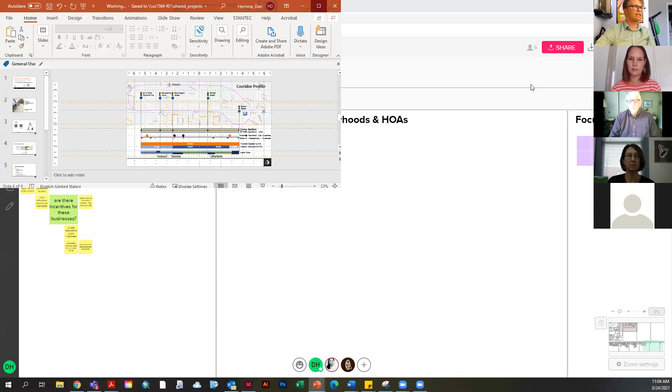Mike will be calling in momentarily here, but in the meantime, we can go ahead and get started on the meeting. First of all, thank you all for joining us. My name is Dan Hemme, I'm a transportation planner here with Stantec. We've been working with the city, as I think most, if not all of you, are now well aware of, on this complete streets study of 15th Street.

We are sort of in the process of this design charrette, this project charrette. We're in day 2 of 3, and as part of that we're conducting these focus groups to drill down a little bit more into the corridor and understand some targeted issues and get some more specific feedback on what are the challenges and what are the opportunities.

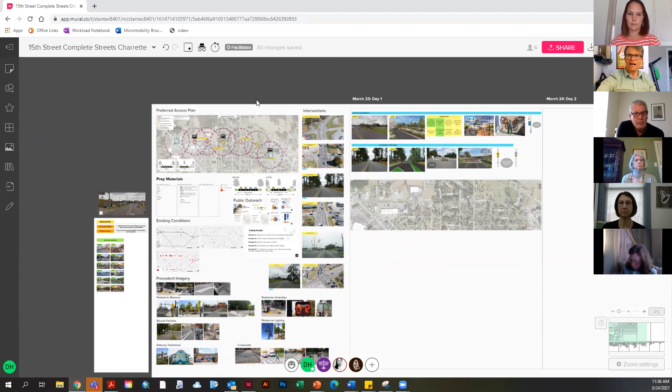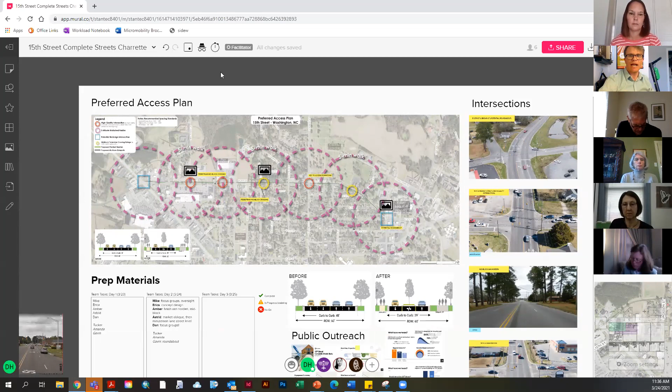So here's a look at what we've been working on. Some of this was done in preparation before the charrette, but over the last day and a half we've really been preparing this concept for the corridor. We start everything from the preferred access plan, which lays out at a conceptual level how people are going to interact with the corridor. What are the intersections that are really important? What are the areas where people need to be able to cross the corridor? What are the safest places for people to cross?

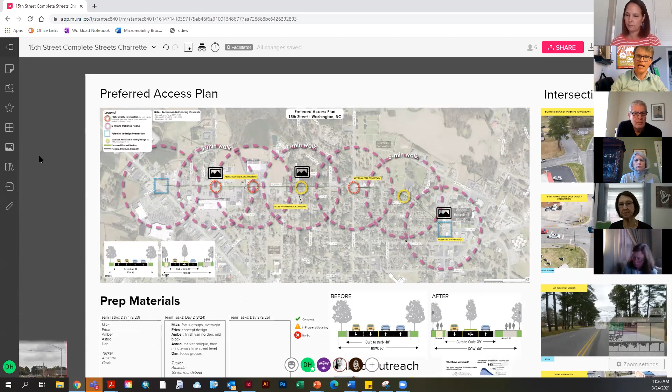And so this really encapsulates all of that. You know, the design and treatments may change, but everything will still reflect this base concept of how people are accessing and using the corridor.

We look at things like Market Street, which is highlighted as what we call a high quality intersection. That's somewhere where we'll be looking at putting in things like mast arm signals for traffic lights, pedestrian countdowns, and high visibility crosswalks at the intersection so people can cross. If there's a median coming up to the intersection, we'll look at having a pedestrian refuge island there to give people the ability to cross and have safe passage.

Other locations, like over at the cemetery, and I'm calling out Van Norden Street there, Vanessa, that's a mid-block crossing. So even though there's not a signal there, these are locations intended to give people the ability to cross the intersection. You'll see that those two are in key locations, in that purple circle labeled as a walk shed. By putting them there, we're creating these overlapping areas in these walk sheds. What those represent is that if you are within that circle, you are within a short walk to have safe passage crossing that corridor, whether it's pedestrian, bicycle, or any other means.

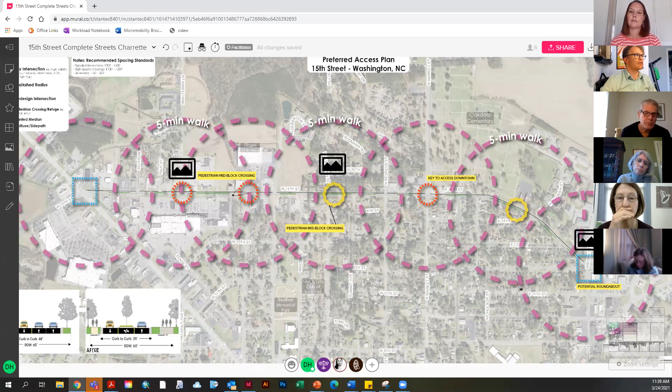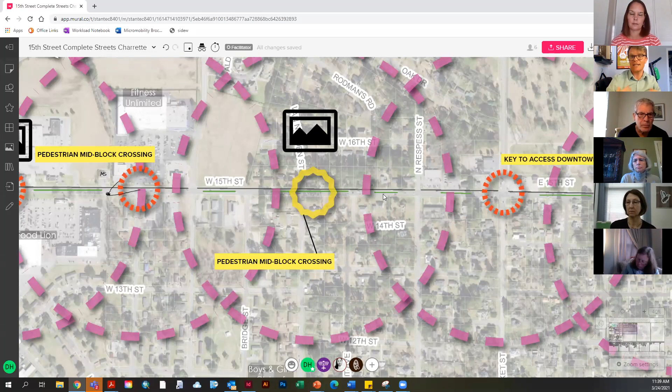So zooming in a little closer, we started laying out ideas for a shared use path along the north side of the corridor. Those faint green bars you might be seeing are areas for pocketed medians, looking for ways to improve the safety and operations of the corridor by introducing a center turn lane, providing opportunities for people to continue using the through lane to drive, because turning crashes are one of the big concerns here along the corridor from people who stop in the middle of the roadway to make a left-hand turn.

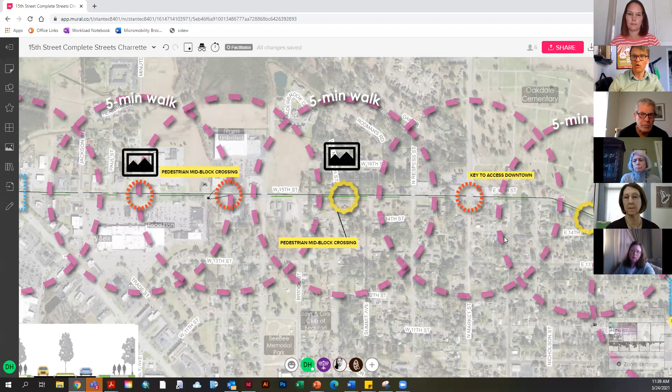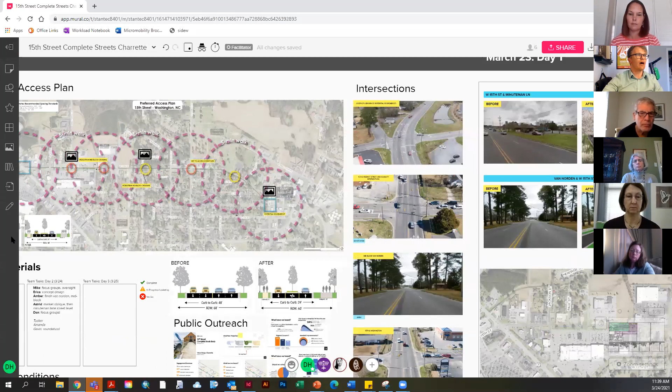It also provides the ability, if people aren't going to cross at those intersections, that they at least have that median in the middle where they can feel some degree of safety doing so. So for these high quality intersections, that's what we start to go in and produce some renderings and redesigns to help visualize what a high quality intersection or a mid-block crossing looks like in practice.

And those are the things we started working on yesterday, in various states of development. We've got Minuteman Lane here, at the right in front of the Tractor Supply. We're looking at what a center median, a planted center median, looks like. What does it look like to have a shared use path on the north side of the roadway? And what does it look like in the context of maybe inviting better private redevelopment?

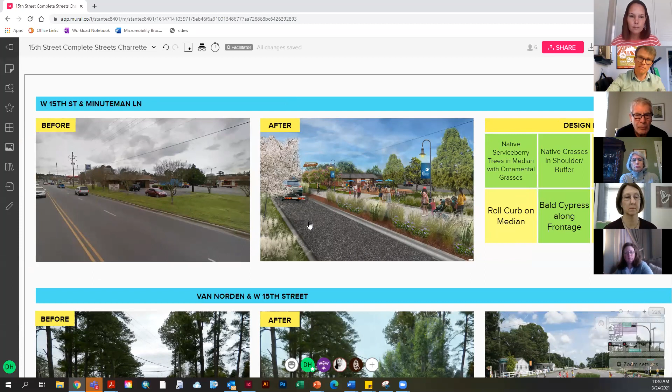You might want to zoom in a little bit, Dan. Zoom in on the before and then transition, because that's the hard thing to see. Sure, not a problem. Yeah, I don't have context on how big the shared screen is here, unfortunately.

So this is what you guys see right now with the taqueria there, and having space for bicycle, pedestrian, for sidewalks, and then this is... So just to put it in context, keep it right there for a second. Just to help you visualize, and now this is Todd.

Ned, you had mentioned some questions before about right-of-way. We're not pushing the right-of-way back. We're not taking additional right-of-way. We're actually moving the outside curb and gutter in. It's 4 lanes right now. We're getting rid of one of those lanes by pulling in the outside curb so we can put in a protected bicycle side path or multi-use path, if you will. That way we cater to ages 8 to 80.

Anybody, from an 8-year-old kid with a helmet who wants to ride their little bike, to a retiree that just wants to get out and stretch the legs and go from A to B.

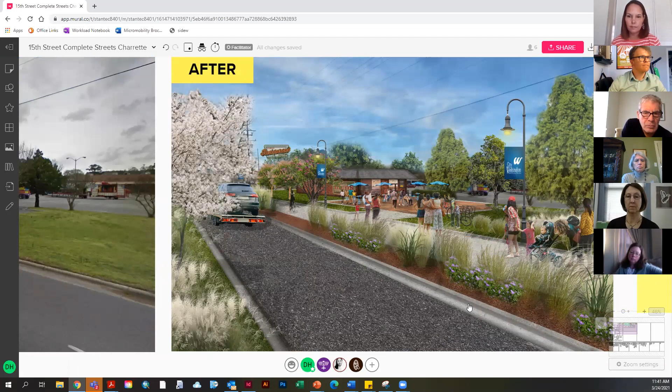When we do that, you can see, and we incorporate—let's go to the next page. This is just a segment where we're talking about putting in a protected, plantable median because there's no curb cuts there; no one needs to take a left turn or right turn in or out. You can see this is right in front of that Washington Plaza, the Mexican restaurant in the foreground. But how awesome would that be, right?

If you zoom in a little, you've got the side path that's hopefully going to be well used, plus outside seating and some low-level ambient lighting. This is repurposing a building that's there, keeping it in context with what's already there—they're still going to serve the same taco they do today. Providing outside seating was one of the things missing along this corridor that a lot of people had expressed interest in.

You have pedestrian-level lighting with a nice banner there to celebrate that. When people see this, along with the physical verticality from the street trees and the lighting, people naturally slow down, just like they're doing on 5th Street. That's what we're catering to—we're not trying to divert cars by any means, but we are trying to get them to slow down.

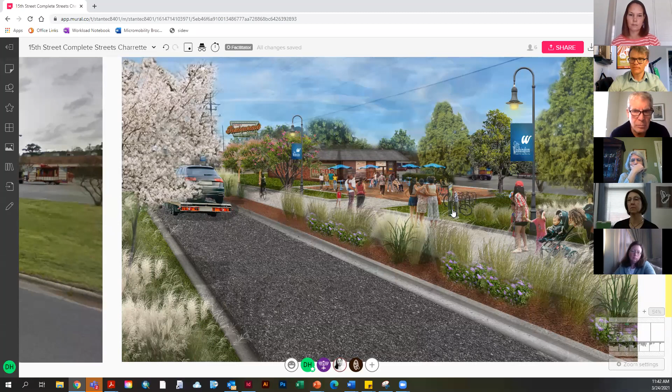Speed differential was the number one issue identified by your chief of police. Honestly, 3 people have died in the past 10 years—that's 3 people way too many who were pedestrians or bicyclists along this corridor. That's a horrific statistic to hold on to.

I've said enough about this one. Sorry about that, Dan. No, not a problem at all.

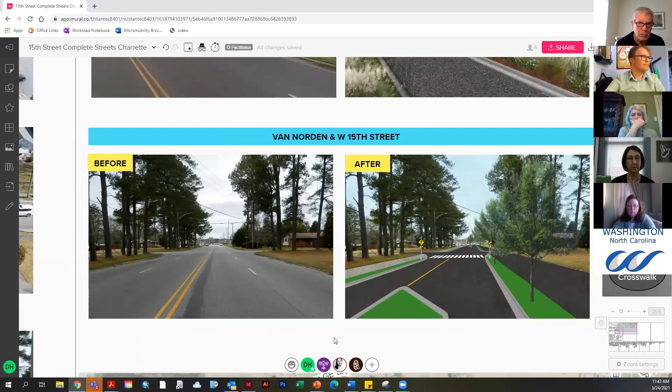You can get a sense of it. The next one is just a mid-block treatment—we don't have to go into too much, but I think Vanessa, you mentioned you live right off Van Norden?

If you think about it contextually—zoom into the before picture—look how far back the nearest intersection is in the foreground. Now, Vanessa, if you're walking down Van Norden, are you really going to walk 1,000 to 1,500 feet to the west just to cross the road? No, and no one does—they cross it anywhere they can.

Exactly, and that's the effort here—thanks for being honest, but the reality is she's right. So what we want to do, as Dan showed with those walk sheds, is make it more predictable for folks to walk across.

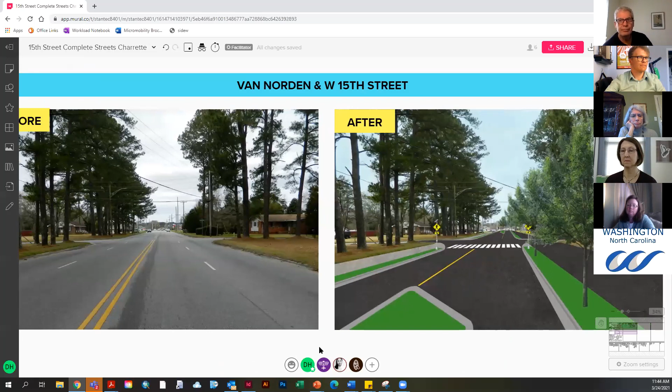So this is a simple mid-block crossing. It doesn't mean we're putting in a new signal, but it does mean some kind of actuation—either a rapid flashing beacon, which could be push-button activated by a pedestrian or a kick-button for a bicyclist—to let drivers know they need to stop and yield to the pedestrian crossing. Right now that person is running across unprotected; you can call it jaywalking if you want, I don't believe in that term, but people are crossing the road unprotected, that's for certain.

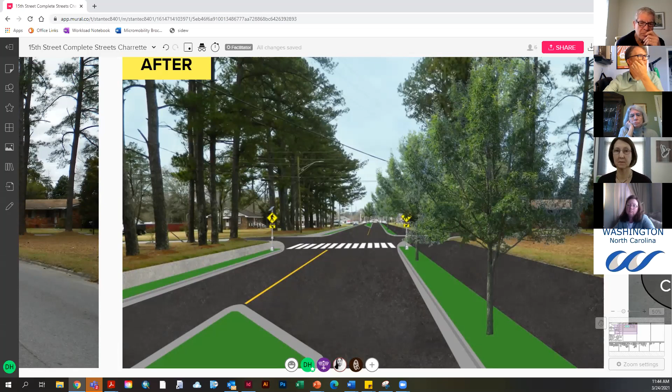This is an earlier rendering—we'll improve upon this later today. We don't have a whole lot more than that, but I'll stop there and see if there are any questions. At least you get a sense of what the community is collectively trying to achieve.

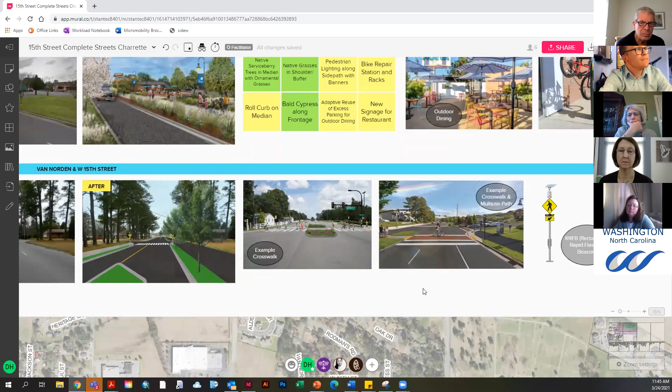At the end of the day, this is very important—the bottom aerial Dan is showing will give you the physical footprint of the improvements, a plan view along the entire corridor. You'll be able to see where the 3-lane cross section is, where the 2-lane cross section is, where street trees are located, and where the high-quality intersection treatments are—high visibility crosswalks, pedestrian countdowns, mast arm signals, as well as gateway treatments.

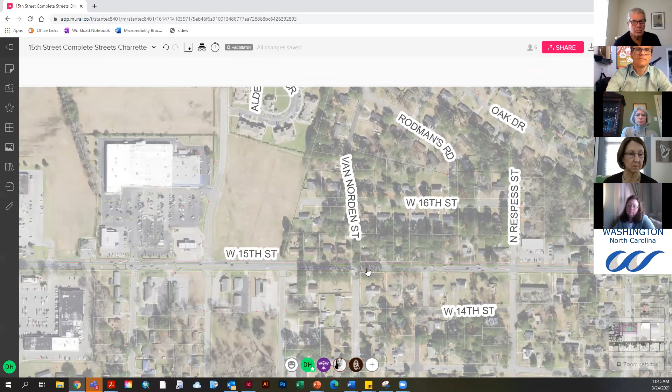We're actually looking at Brown Street to redesign and potentially consider for a roundabout. As you can see as we zoom in, it's a horrifically skewed intersection—a dead man's curve.

And that was one of the high signal locations that Chief Drakeford had mentioned, that people are zipping through, trying to make the light and going right through the red light. So all we're trying to do is clean that up a little bit and slow down cars. The good news is it's continuous, people can keep flowing, just at a slower pace. It's the number one traffic calming device you can use, and it takes care of a lot of those bad, horrible skewed roads coming in. It's a 5-legged intersection, and this makes it a little more predictable for folks.

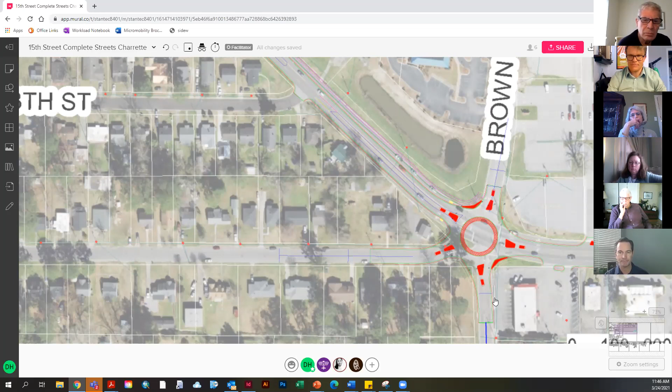And lastly, it's a gateway. When people come into your section of 15th Street, we want them to realize we're treating it a little differently, and you're going to see a lot more people walking and biking. So I'll stop there, are there any questions? Later today you're actually going to see some of this corridor come to life, showing different features. So I'll stop and see if there are any questions or comments, things you'd like to see change.

All right, Laura. Yeah, I like seeing that roundabout you just showed, because there are entries in and out of O'Neill's drugstore and other things right after the light. So you go into that curve, and people are wanting to scoot along while somebody's getting ready to stop and turn into a business. That is real, and I believe it would be very helpful. I also like that image, that you're changing venues, so to speak.

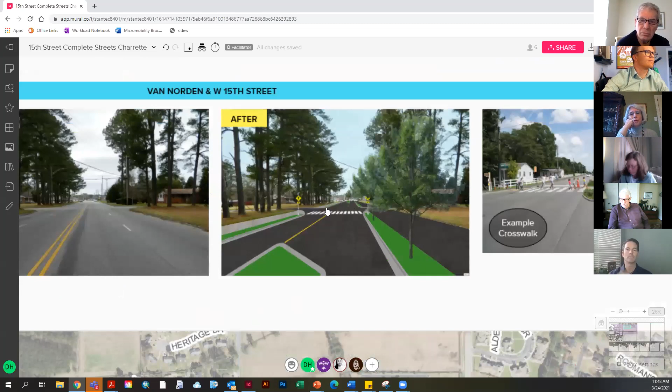Also, with the crosswalks that are not at a light, I think they'll probably need a whole lot of education. I know the crosswalks we have in Greenville near the hospital that aren't associated with a traffic light, I don't think a good deal of the public understands that when a pedestrian is crossing there, they have the right of way and traffic should stop. So I'm thinking there'll need to be a lot of education for people to understand that if there's a pedestrian wanting to cross, you need to stop and let them go across. But I don't know if that's part of your package.

That's a good point, and I'm going to ask the question too—you guys can help design this as well. You have two ways of making drivers more aware of a crossing pedestrian, Laura. That's a great point. The one is what you're seeing here, and this isn't drawn to scale, but it's called a rapid flashing beacon. It would be actuated by a pedestrian or someone on a bike pushing a button, the flashers would go and activate, and when people come to a stop, that pedestrian goes.

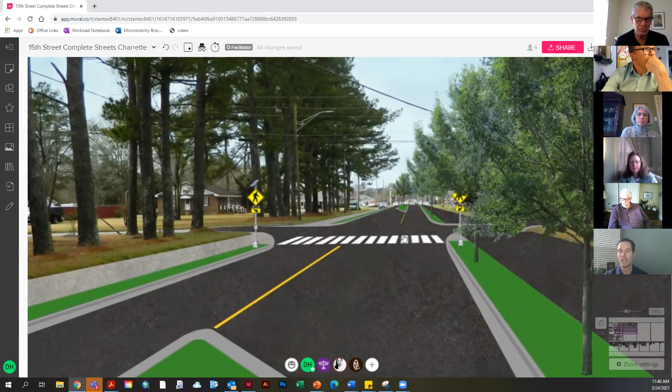The other method is called a hawk signal. I don't know if you recognize those, but a hawk signal is basically—I think it's probably the bottom left hand image—an actual signal. So when a pedestrian pushes the button, it actually forces people to stop. It's an actual stop light that forces people to stop, much like you see in the bottom left-hand corner there. It's an actual light controlled by pedestrians if they push the button.

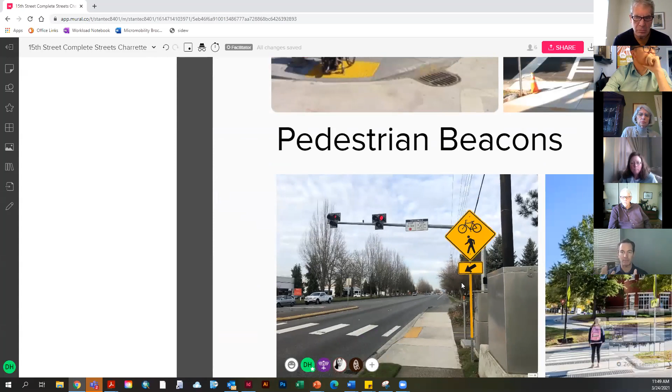So what do you think? Keep in mind this is going to be a 3-lane section now, not 4 lanes, but there's still going to be a lot of traffic, probably about 18,000 vehicles a day. Which one would you guys rather prefer and why? Anybody can answer that. Are you asking which kind of signal? Correct, Ned, correct—yeah, which one do you think? And it really comes down to demographics too.

It's probably not used, neither of those two devices—someone correct me, Jonathan or Aaron. I don't know if either of those two devices is currently being used in Little Washington. If not, yeah Ned, that's a compelling question. Which one of these—obviously the rapid flashing beacons are cheaper, and they're better than not having anything, providing flashers to get cars to stop. The hawk signal is more expensive, but it's an actual stop signal controlled by pedestrians. So which one do you think is more palatable to understand and use in your community?

Vanessa? I think the hawk signal would be better, especially given Laura's point about people not fully understanding that when a pedestrian is there, they have the right of way and you're supposed to stop.

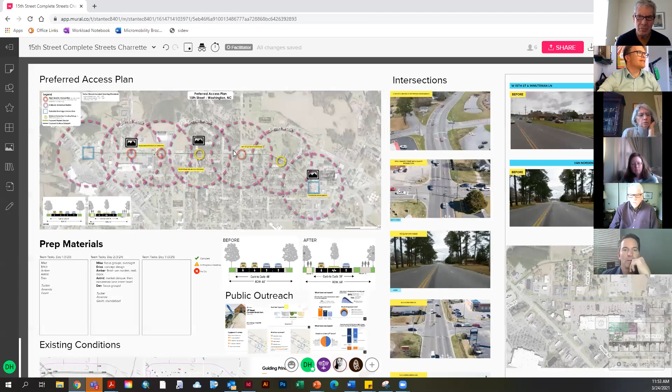The location of that mid-block crossing, as we've proposed it, is actually closer to the church, to the Assembly of God there. Part of the reason it was brought up in the bike-ped meeting yesterday is that the sight lines here, because this is on a curve for cars coming around the corner, they may come up on a pedestrian or bicyclist crossing in a location like at Bonner and Nicholson, and not have much time to react. Whereas down at the Assembly of God, there's a little bit greater sight distance.

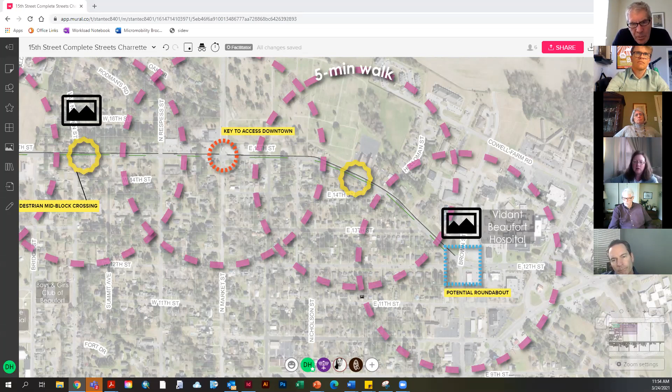Well, there's a little problem with that, which is that Bonner is the alternative parallel street when you're walking or biking, and you don't go down Market because it's busier. Bonner is less traveled and has no on-street parking for a lot of its length. And so that's the road where if you're going to the cemetery, the cemetery entrance is right across the street from where Bonner empties into 15th. So it's like the continuous pathway: coming north on Bonner, you go right into the cemetery driveway, and then that's the exercise track.

So putting that crossing further down, away from the natural desire line, is an issue. I'll just point that out. I like the HAWK because I know that the RRFBs rely on drivers to control their own behavior, right, and they have some problems. They're not favored by pedestrian advocates. I mean, they're approved by traffic engineers, but they're seen as problematic by the active transportation community because they don't really protect vulnerable pedestrians in the same way that stopping traffic does.

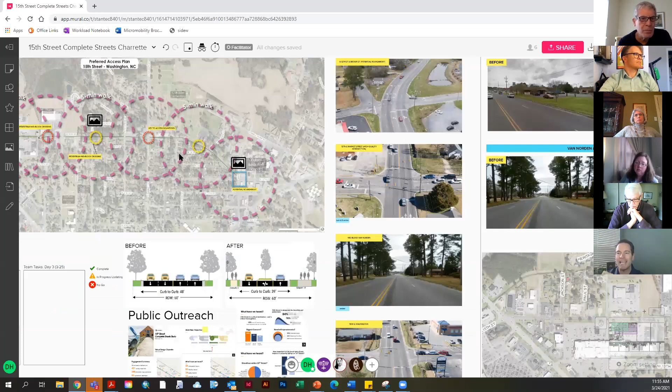Yeah, yeah. So are you, Betsy, suggesting a HAWK signal at both locations? And here's the benefit, let me qualify: the distance between the two adjacent signals, between Market and Brown Street, is 2,800 feet. That's why we picked where we picked. It's the mid-section between them, and it's at the most tangent point when you zoom in on that corridor.

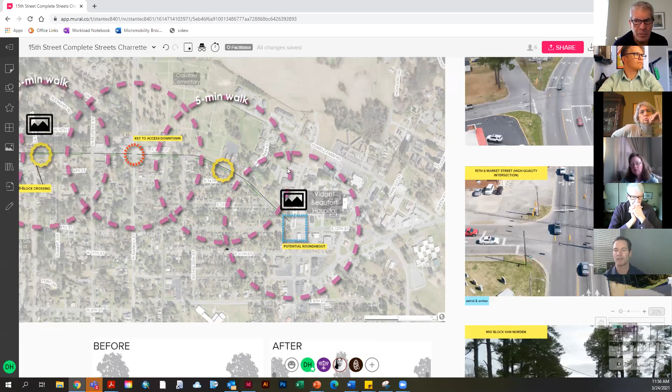Not to say that Bonner folks can't cross at Bonner, but there's no signal there, and you can't put that signal so close to Market. Right, and so if we do put in the HAWK signal right in front of the church there, we can tie in whatever signals we have to create a progression control signal system. If it's a HAWK signal, we can do that; can't do that with a rapid flashing beacon. So maybe Betsy will understand, you probably understand that as a planner-engineer, so that makes it attractive if you're suggesting putting a HAWK signal at the cemetery.

Yeah, I mean, I like the progressive signal idea. I didn't know that HAWK signals could be tied into that. Yeah, what he's talking about, everybody, is that you can set the speed limit and then time the signals so that it's not advantageous to go faster than the speed limit. You're essentially letting people flow through as long as they are complying with the speed expectations, because the signals are timed for that speed.

My observation is that people drive faster in that section by the cemetery, between Brown Street and Market, actually between Brown Street and Respess, because there's less going on and it feels more wide open. People speed down that part of the road. I would rather see a HAWK signal at that crossing too.

Good point. As traffic engineers, as we do more analysis down the road, if this goes forward to final design, they'll look at the traffic, they'll look at the volumes, they'll look at the timing. We want DOT to look into that and incorporate it in the final design too.